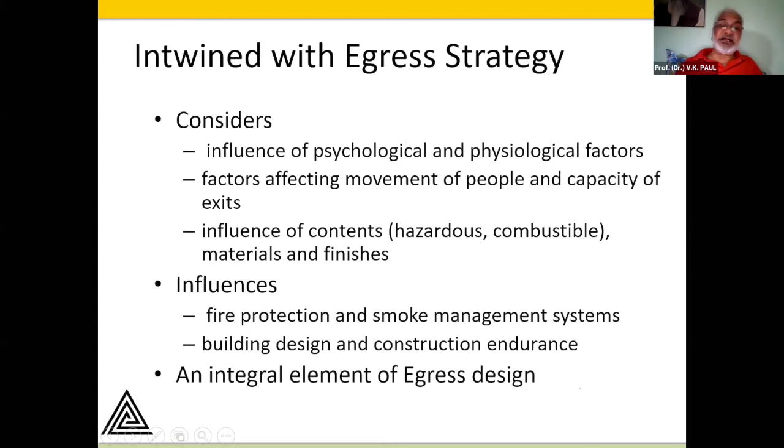Let me give you some idea about how strongly it can impact. Where containment and compartmentation are very well articulated, executed, implemented and followed, they have both strategies very clearly defined, whether they want a staged egress or an all-out egress.

Different countries follow different norms, but essentially the underlying principle they follow is how robust a containment and compartmentation they are able to achieve within the building. So if you are able to do well, then you have both these options, whether you want a staged egress or all-out egress.

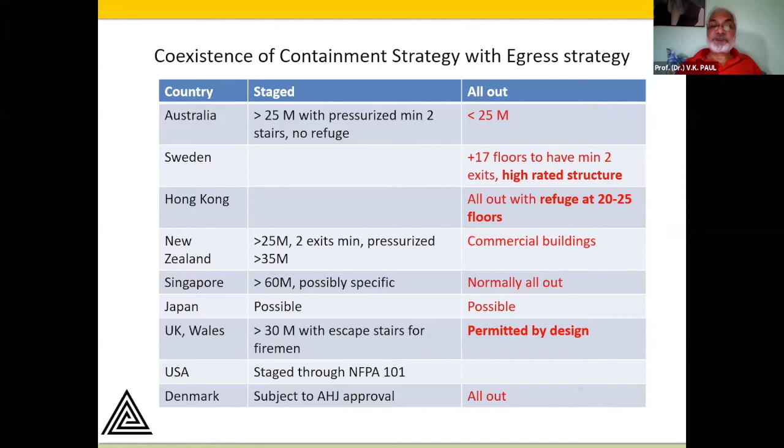So the impact of this kind of strategy is far beyond what we would normally think of. That is just to amplify that in complex buildings this can be a problem.

I would like to start with the issue of fire containment, which is basically the subject under which compartmentation is a subset. Now, basically, what we have is passive fire protection as one of the two approaches of fire safety. One is active and the other passive.

The passive measures require no actuation, and they have a protection which is always present, and it's proactive. It provides sufficient time for the building occupants to exit the building, whereas in case of active systems, they need to be robust.

Active systems have issues related to operational and functional reliability, whether or not they will work, whether or not they will perform the way we want, whether or not there is some kind of another variable that will fail.

Here it is important to highlight that active systems are actually subordinate to the passive measures, and it is only to the residual risk that the active systems will perform. So first the passive systems must do the needful, and then whatever is the residual, that's actually the philosophy behind this.

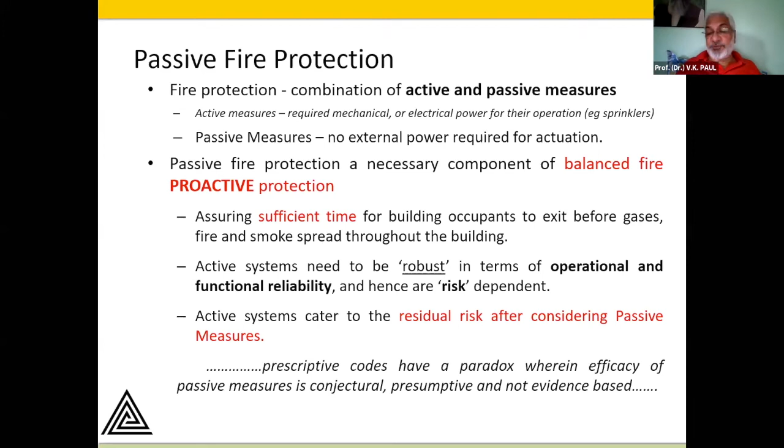Now, in the category of passive fire protection measures, there are three options. One is by control of rate of fire growth, by fire load material characteristics, using safe materials, non-smoke producing or fire resistant material. That's one area where by passive means we can do this.

The other one is to look at the emergency egress, etc., wherein people move out safely. The third part of passive fire protection is what today we are discussing. So it's actually part of a large family of measures that we look at, wherein the objective is to confine the fire, etc.

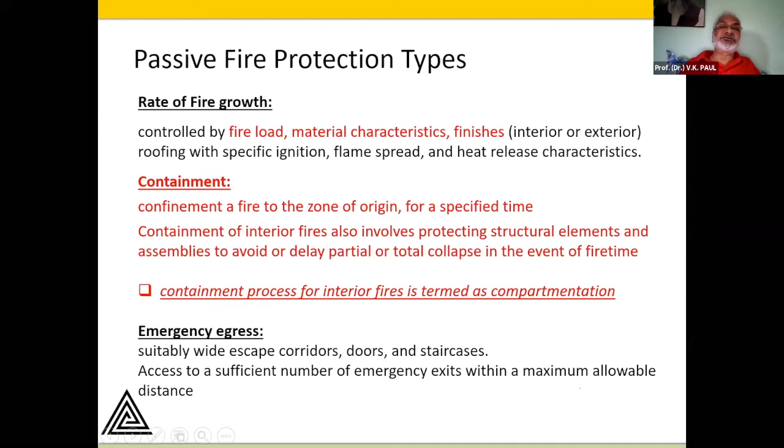And within a containment process of interior fire, compartmentation is one of the areas. Now, I want you to just have a look at the big picture in containment versus compartmentation.

It's not a new concept. Earlier, towns were, way back 300-400 years, divided into neighborhoods so that fires don't spread, and the neighborhoods were divided into building blocks, so that mill type of buildings started coming up way back. Then from there, the concept of fire containment or compartmentation within buildings started coming in the last century, and after that there has been considerable improvement.

Now, this offers protection against passage of flames, hazardous gases, etc., and protection is provided by walls, floor, ceiling assemblies, etc.

If you look at the various containment strategies, principles, or options, the list I am showing here - fire protection structure, doors, shutters, and compartment walls and floors - is just one of them. There are a whole lot of other areas which are also part of the containment family of passive fire measures, which together give us that reliability in the basic design.

Some of you would be aware that there's a new concept NBC also talks about, but in hospitals and ICU areas we very strongly talk about defend in place. That actually is a containment strategy, not a compartmentation measure per se, wherein the objective is continuity of process as a fundamental premise.

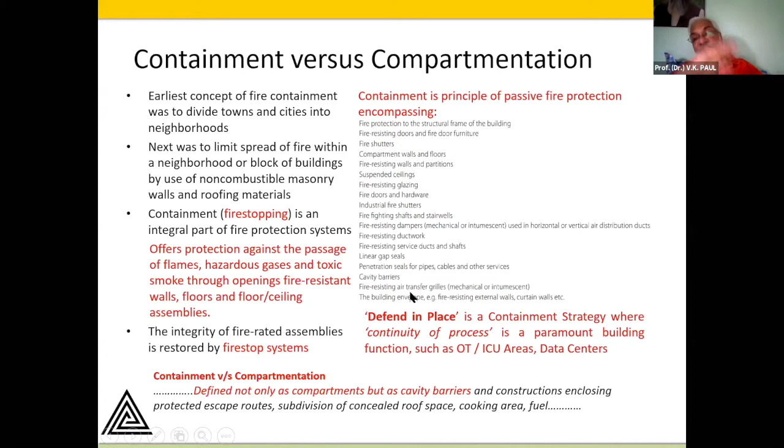It's not a compartment stopping in one zone, but protecting and isolating an area. That also is part of the philosophy - for both of them it is slightly different.

Containment objectives are very simple, and we can easily relate to these. It has to restrict the fire irrespective of where it is, how it is detected, and the containment has to happen fail-safe - it should not go from one area to another, which means it cannot act on itself. So the cavities or openings, if required to be shut, have to be ensured as fail-safe options, and the objective is to provide safety to life and property.

Normally we would not talk about property safety, but in this case it also refers to containing the impact and limiting the fire and consequent hazard to people - internal hazard and exposure hazard - so that adjoining buildings etc. should not be affected. This is one area in fire safety which is so all-encompassing, affecting so many areas of fire safety.

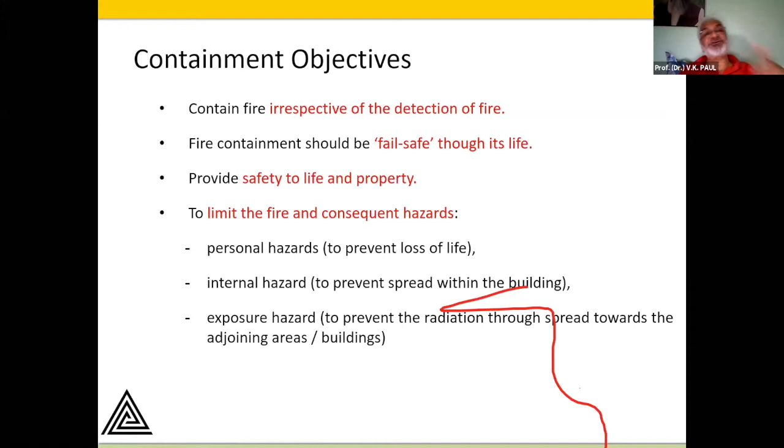I think there is no other philosophy which gives you such a wide variety of objectives to be fulfilled, and that's actually the significance of containment and the reliability that the fire department would have.

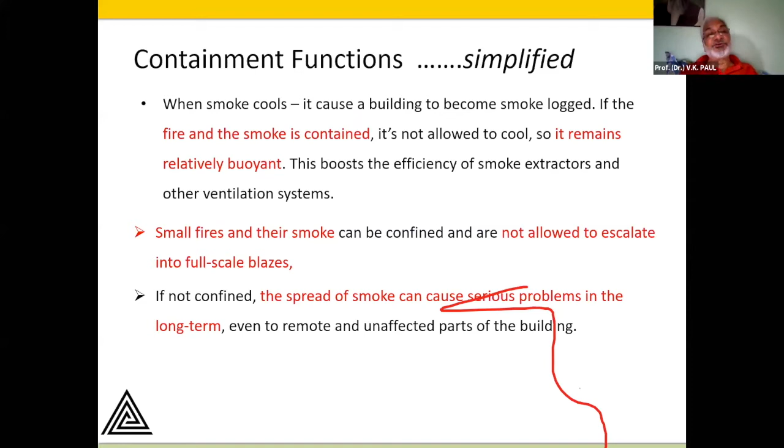In a very simplified way - I don't know why this red color has come - containment functions, in a very simplified sense, control the smoke, as RC Saab was saying in the beginning. It has small fires, and the smoke can be confined and not allowed to escalate into a full-scale blaze, which can cause a serious problem in the long term.

Now, in fire load - this containment, the mother of containment, is actually the fire load issue. How you arrive at containment is not just the square meters of an area and then you provide a wall or something - that's a simpler way of looking at it. What we are looking at is that the fire load decides how big the fire or conflagration would be, and therefore what should be contained.

Here the severity of heat content is to be seen, and therefore we have to look at the fire density and the fire load - how much of the fire load, in terms of calorific value, is to be confined in one place, and what is that potential. Unless that is related to containment and compartmentation, it doesn't make sense.

If you look at the loads in buildings that one would typically consider, it looks at dead load, imposed load, wind load, and any other, including temperature loads. The temperature loads are the fire loads - whether or not the structure will perform.

In the last part, I think it's very interesting to see that there was a study in IIT Gandhinagar in 2018, which says that as compared to 20 years back, the fire load in typical buildings in India has increased three times.

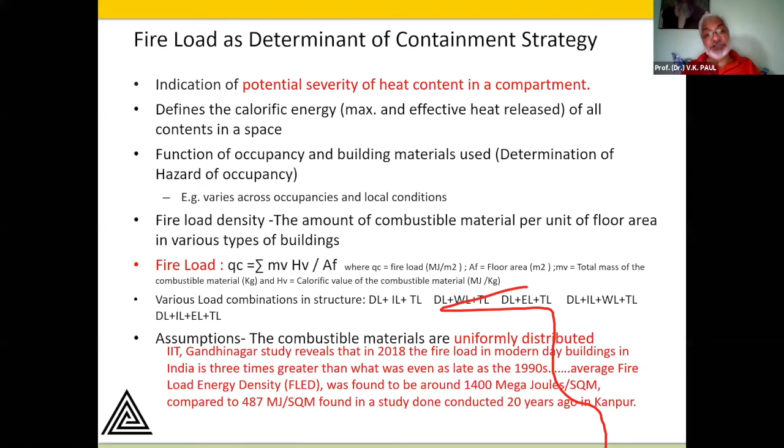So what is the call for us now if fire load is increased 3 times and we are holding on to the issue of compartmentation as one fixed entity that remains the same over the years, without looking at the fire load? I think we are looking at fool's paradise. If the load increases, then the specification and area for compartmentation or containment will also have to change. So this is a very big eye-opener study that calls for really re-examining the entire compartmentation and containment strategies we follow.

This is an important issue. Way back in 1960, we had IS 1641, which addressed different building types and what should be the maximum permissible fire load and how it should be distributed. Over time, society improved, and we forgot about this issue. Even in the National Building Code of 2005, there is a small table shoved in the corner, Table 26, which gave the fire load density, allowing you to see whether the fire load is distributed so that your compartment containment can work.

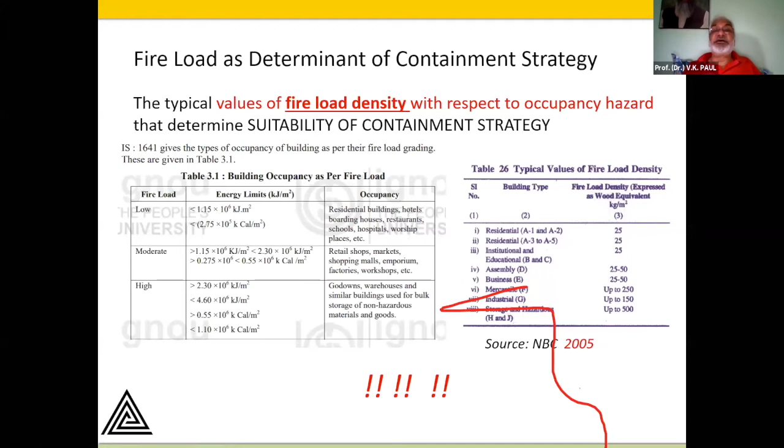Unfortunately, Table 3.1, as I'm showing, got removed from our codes and standards much earlier, and this Table 26 got removed subsequently. But to my mind, removing these two things has a bearing on the principle of containment and fire safety.

Then again, if you look at National Building Code Part 6, where we look at the structure, the imposed floor loads and load characteristics define the endurance of the structure. And if we are looking at fire endurance without having looked at what kind of fire load we are talking about, I think we are not doing justice to the safety of the structure and the occupants, because we are not looking at how much heat is coming. We are actually closing our eyes, putting something in place, but we don't know how big our problem really is.

So that is where there is a gray area, and I think our audience can actually evaluate that and move forward on their own, notwithstanding whether or not it is there in the NBC, but the principle remains the same.

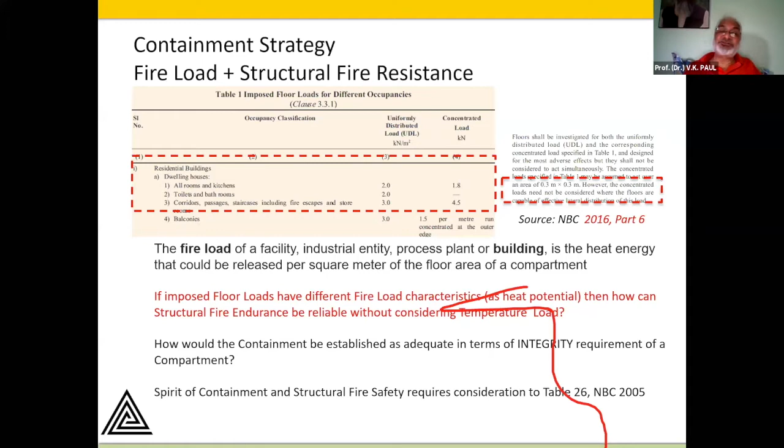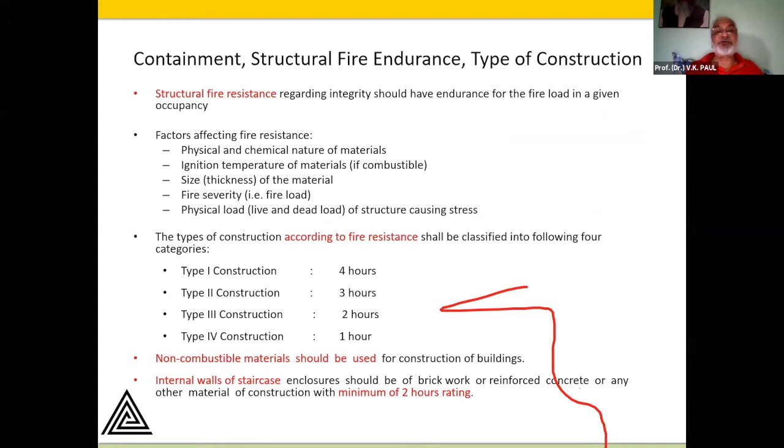Now the same principle gets translated into structural fire and type of construction, and the National Building Code has a very elaborate way of explaining all this. This is not away from the subject we are discussing, and many times people just look at it and overlook what is required to be done. These tables actually have their purpose in our methodology of containment, structural fire endurance, and type of construction - codes, they're all bunched together. So the mother of fire safety actually starts evolving from a description like this.

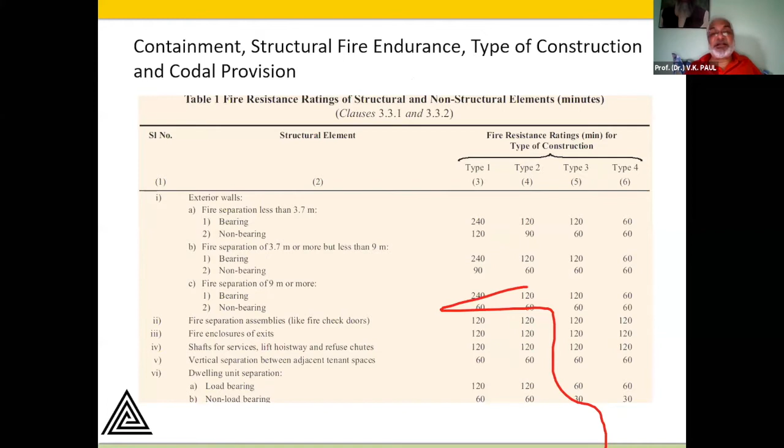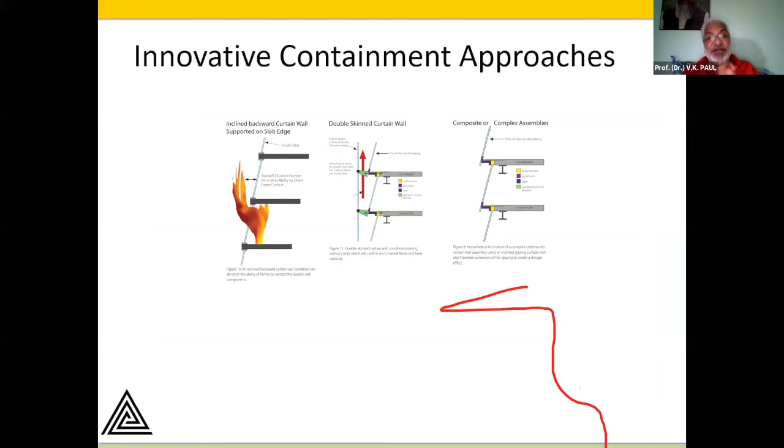Now, as far as our other areas of containment go, for example external perimeter protection, that also is part of containment strategy. I found a very interesting set of envelope designs, where somebody is looking at how flames leaping back into the building can be protected by different options. Now, these are all containment approaches.

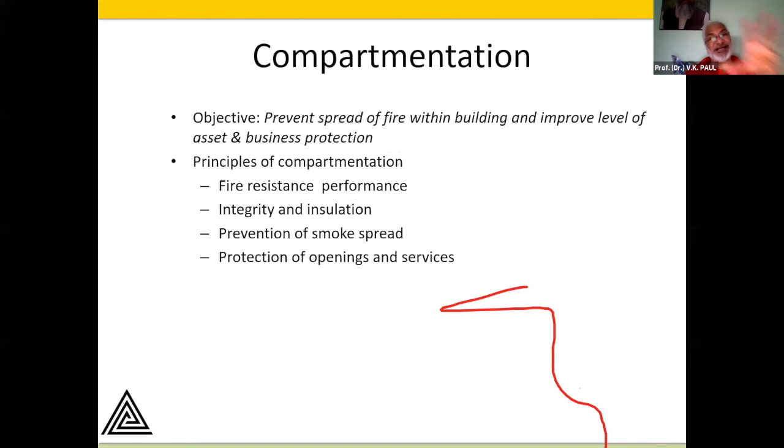Coming to the compartmentation side, the objective is again a subset of that, wherein we are looking at prevention of fire spread within the building. We are looking at fire resistance - performance integrity means it should not lose its position or go out of place under the pressure of expanded gases - and insulation against heat, prevention of smoke, and the openings for services need to be protected. So that's actually the purpose of compartmentation.

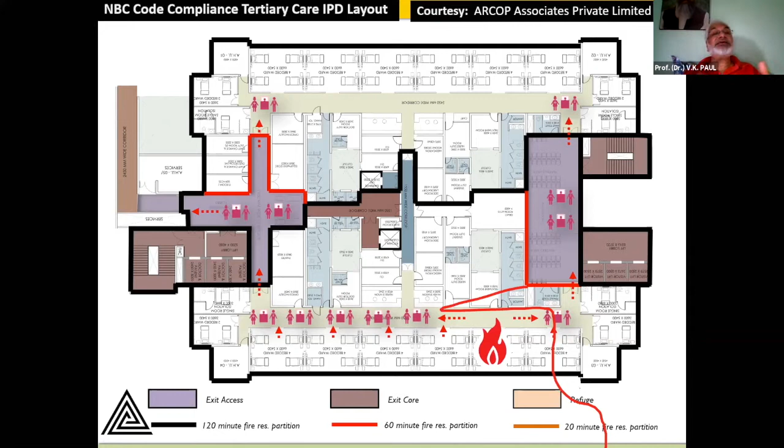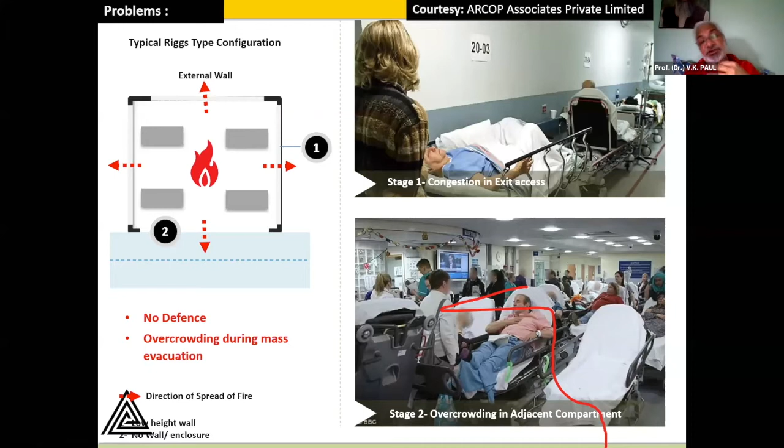Where there are large combustible materials and inflammable materials, pantries are not segregated. I comply with these requirements, but unfortunately I can't protect them. So what we found was that with a large number of entire units shifting to another side, there is no place there. This is a situation we still cannot avoid. These patients, if they have to stay there for a longer time, we cannot have. So we discussed with people like Nitin, and told them this problem will continue to exist. So they came up with a more detailed interpretation of the document.

The complete design was modified, where the same unit is divided in two parts. We have a 20-30 minute partition for each ward area. So if you have to move, you just move people away, you have a protection of 20 minutes. Then from one area you can divide this into a 60 minute area, joining within the 30 minute zone, within the same ward unit. Inside, the different combustible materials and storage are protected differently. So here I don't need that much manpower to actually shift everybody out. This is much more refined, and wonderfully, what has been done is creating an external perimeter of some kind of refuge area where people can be taken out without worrying much about where to go.

Now the best part is that when we change from one design situation to another, the area per patient and the cost per patient of this building remains the same. Which means if you implement all this, the costs don't go up and the area doesn't start increasing. We have an example of this. And if there are any issues or questions on this approach, Nitin is here with us today. We can ask him to clarify these things.

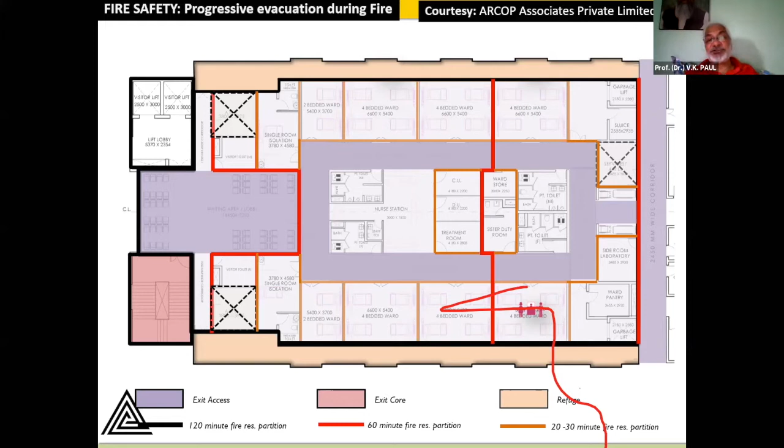Right, Dr. Paul, there are other examples. Sir, just I have to disturb you - I'm enjoying your speech, but the time is up. Yeah, my time is up, sir.

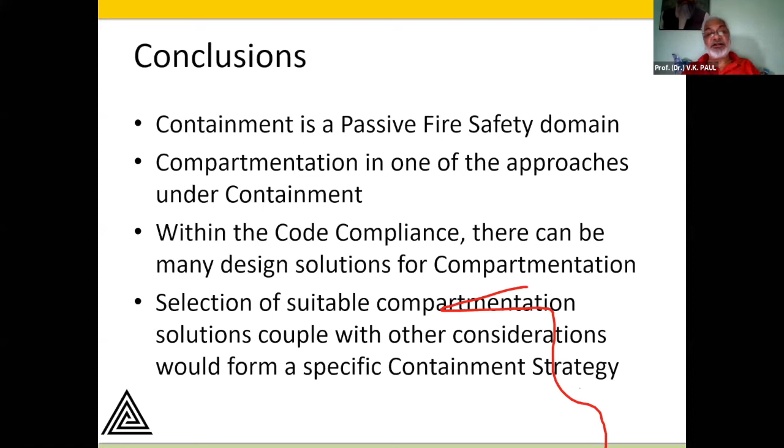The containment is a passive strategy. Compartmentation is a subset of that. Within code compliance, there can be many solutions, and they can all be equally efficient in terms of cost, etc. The selection of a suitable compartmentation solution, along with other considerations, can form the containment strategy. Thank you very much, and if there are any questions we will take them.

And Nitin is also there with respect to that building, he can explain if you want to ask him, we can take him in the question answers later on. No, we can take Purandare, and people have questions, then later we'll ask. Yeah, we'll take the question at the last. I request Mr. Purandare to take over, please.

Mr. Purandare. Yeah, thank you, sir. So, is my screen visible now? Oh yeah, okay. So thank you, Professor Paul, that was really a lot of information in a very short time. Thank you so much, and I think you covered most of it - in fact I'll be able to skip some of my slides because of that.

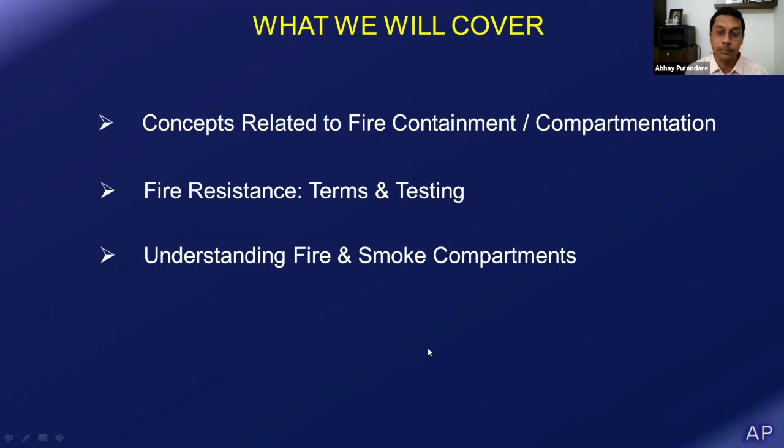So this is basically what I will cover here, and I'll try to restrict myself to concepts. I believe that if the concepts are clear, then the code requirements themselves become much more clear and more acceptable to readers. As Professor Paul has already covered this, I will not spend much time on this slide.

When we talk of passive measures, we are actually doing two things - Professor Paul covered this, but I'd like to cover it in more detail. One is we try to restrict the rate of fire growth, by controlling the ignition, flame spread, and heat release properties of materials, interior finishes, external cladding and roofing. The second is containment - we try to restrict the fire to the compartment of origin or nearby areas, at least for a specified period of time.

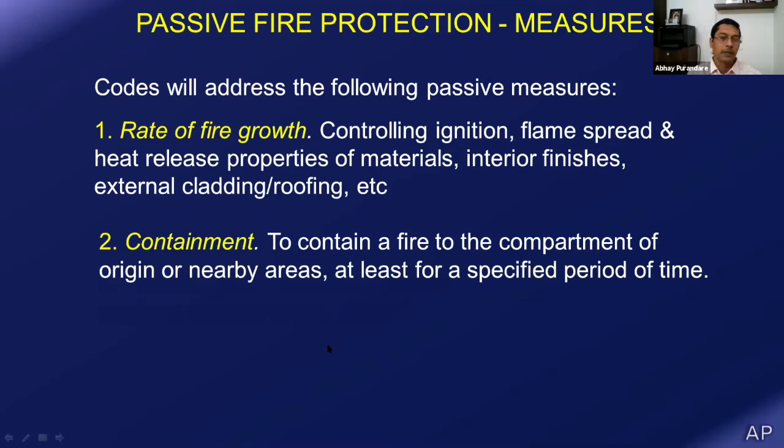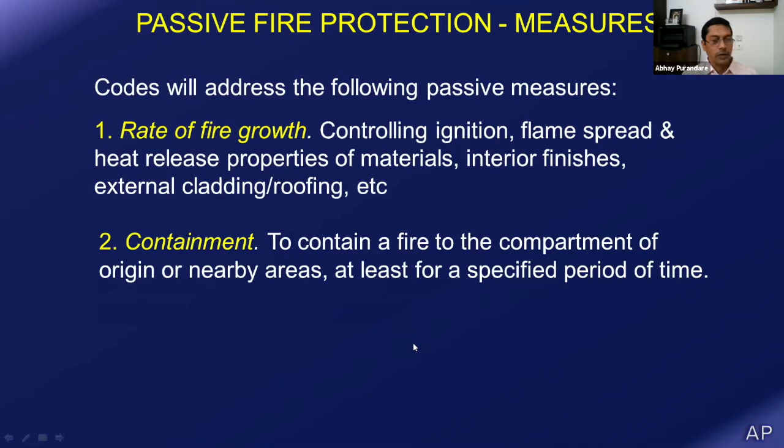As Professor Paul said, containment is a strategy, and it need not be restricted to a building - it can be restricted to a city, or even a large area. Nowadays, when we talk of forest fires, they talk of containment of the forest fire. So containment is where we try to restrict the fire to an area and bring it under control. When we talk of containment of internal fires, it's actually compartmentation, as Professor Paul said - it's a subset of containment.

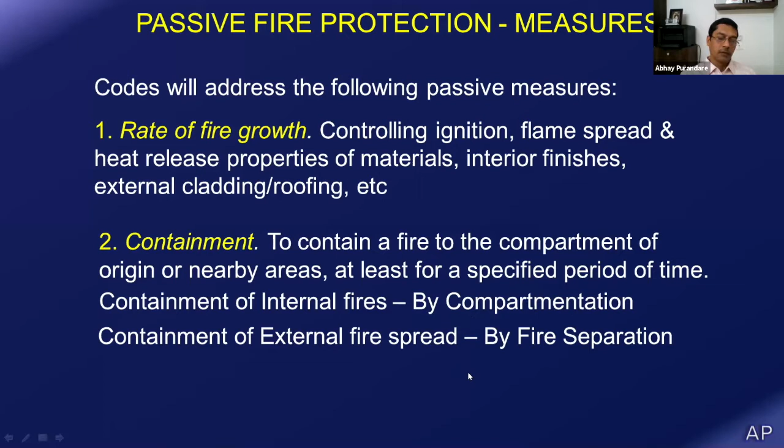When we do containment of external fire spread, we use fire separation. Fire separation is the distance we need to maintain between buildings to ensure radiation is not a factor for fire spreading, which used to be the case earlier. We had a lot of cases of major conflagrations affecting cities, and this used to be the problem.

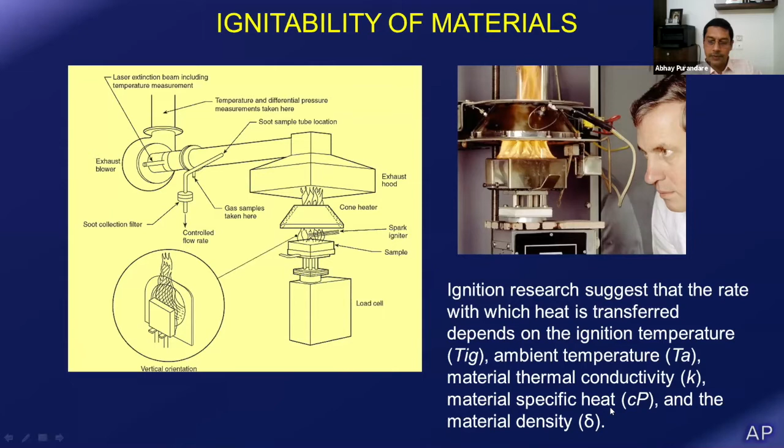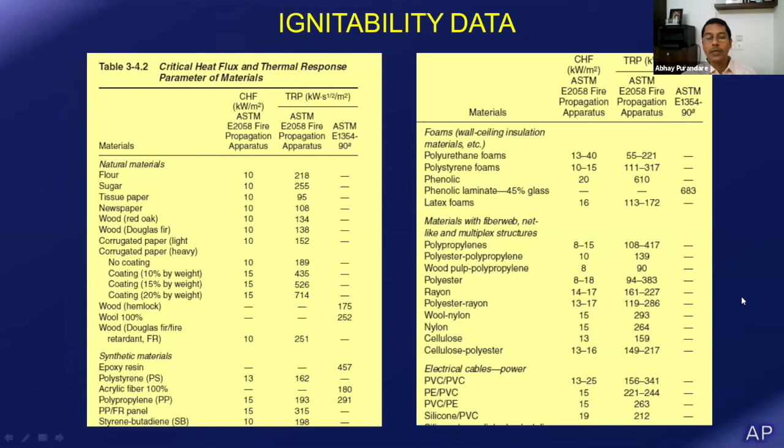Today, when we talk of ignitability of materials, we have a lot of data. We have equipment to characterize the combustion properties of materials - ignition temperature, thermal conductivity, material specific heat, material density. Today we have a large amount of data available, so we can use this to ensure that fires don't grow quickly, to the extent possible where it's possible in design.

When we come to actually controlling the heat energy transfer, once there is a fire, that transfer is what causes the fire to increase. So we use two tactics: we try to control the fuel properties, or we try to control the environment, and we try to control the source-fuel interactions, controlling the heat energy transfer process.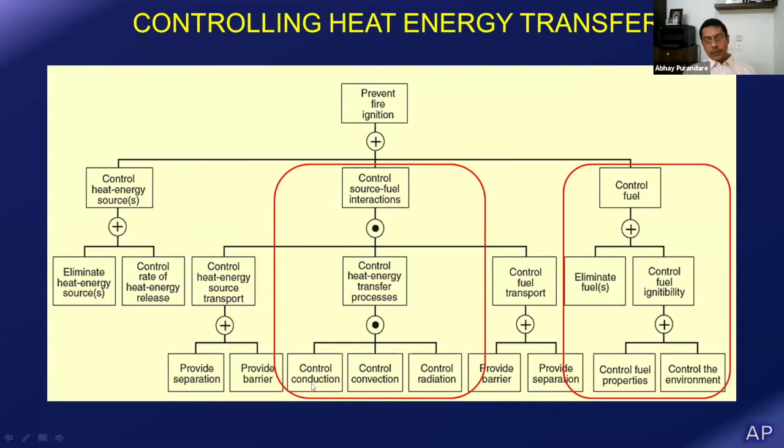In case there is a fire in a compartment, I need to ensure that energy is not transferred to other combustibles which are in close contact with that - that's where compartmentation comes in. So what I'm doing is controlling the conduction, convection, and radiation of the heat from a fire.

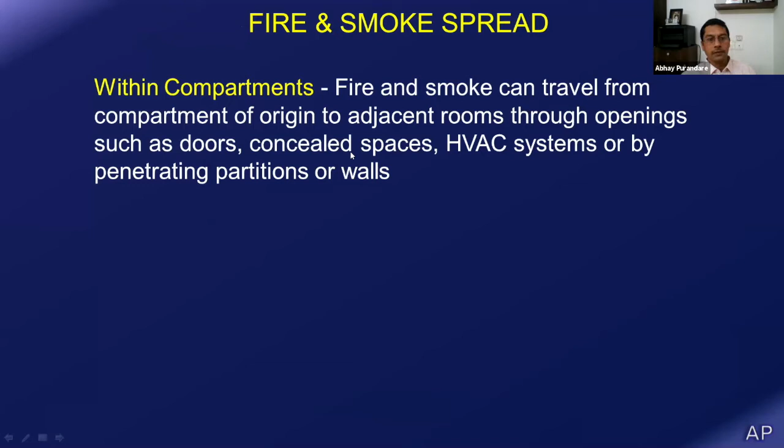Talking of smoke spread within a building fire, we know that within compartments, fire and smoke can travel from the compartment of origin to adjacent rooms through openings such as doors, concealed spaces, HVAC systems, or by penetrating partitions or walls. Between floors, there are always services connecting different floors, and that becomes the passage for fire and smoke.

Service ducts, elevator shafts, stairways - these allow the convected heat and smoke to travel upwards. If the fire-rated separation of these stairs or shafts fail due to any reason, then they become chimneys. They allow the heat to travel up very fast - especially more the height, more is the stack effect - and this allows the heat and smoke to travel fast.

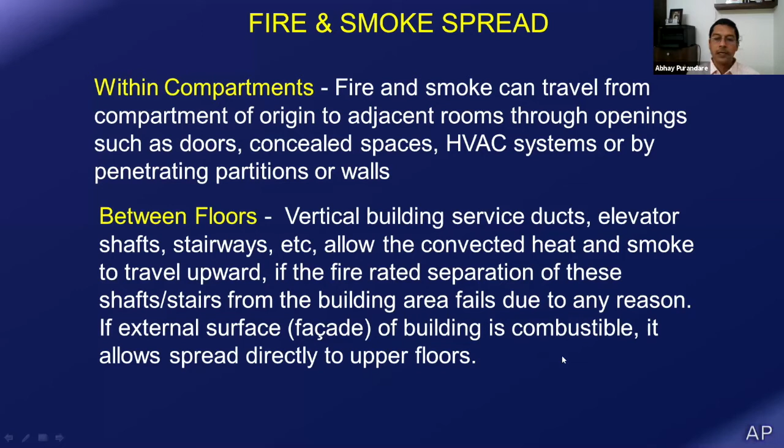Of late, what we are finding out is that the external surface is becoming a big problem. It's allowing fire to spread directly to upper floors. So you may have good internal passive fire protection, but if your external surface is combustible, then it allows the fire to spread upwards as well.

But the reason why it failed was that the fire grew so fast, the amount of combustibles were so high, that the actual fire size was much more than what would have been expected in this kind of building.

The fire occurred on the 22nd floor in a linseed oil-soaked rags, so some furniture work was going on. As you know, linseed oil self-combusts, so the phenomena of self-ignition takes place in case of linseed oil, and that happened.

By the time the fire department arrived, the fire was well developed and had dropped down to the 21st floor also. Heavy smoke had already entered stairways and floors immediately above the 22nd. Fire continued for 19 hours and involved 8 floors at its peak. Fire attack was hampered by complete failure of the building's electrical system and inadequate water pressure. So there was a problem related to firefighting, but the fact is that the fire size on those floors was so high that though fire compartmentation was provided, fire-rated exit doors were provided, they could not sustain that attack from the fire.

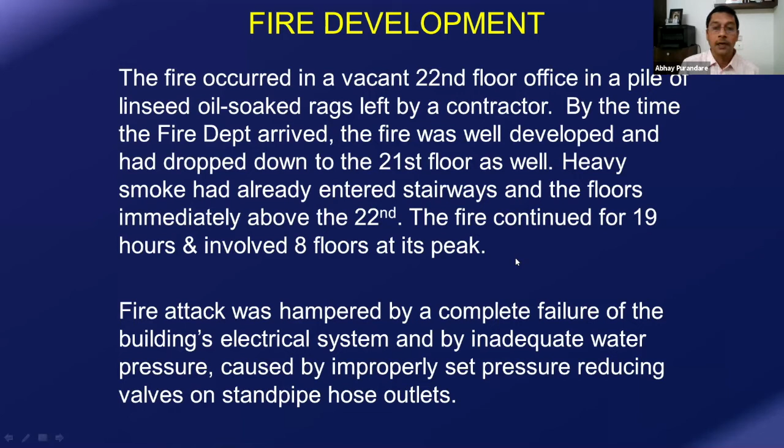Fire-resistant rated construction features, particularly floor-ceiling assembly and shaft enclosures, failed. Ventilation openings in stairway enclosures permitted smoke to migrate into the stairways. Unprotected penetrations in fire resistance rated assemblies and absence of fire dampers permitted fire and smoke to spread vertically and horizontally. As Professor Paul rightly said, it's not just about providing a fire rated wall - there are so many aspects, in fact much more than the walls, that are important, and it's the weakest link here which matters.

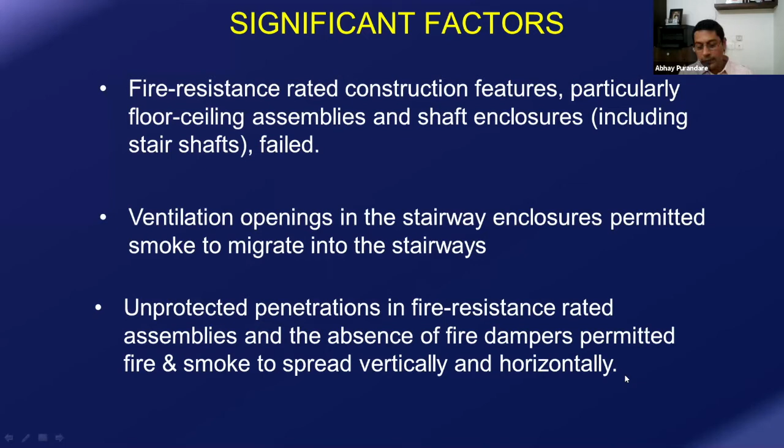So that's from where the fire will spread. This is another incident I'd like to share. This is different because the fire spread not from the inside, but from the outside. This is the First Interstate Bank. What happened was the fire started around the 12th floor, and then it flashed over.

The floor plate was about 2,200 square meters, which was a big floor plate. There was no compartmentation, and because the fire size was big, it flashed over, flames came outside, and then it spread upwards. About 6 floors were affected in this fire.

So fire originated in an open plan office, meaning there was no separation of the space, no compartmentation within the floor. Fire extended to the entire open area. Several office enclosures fully involved the 12th floor except for the passenger elevator lobby.

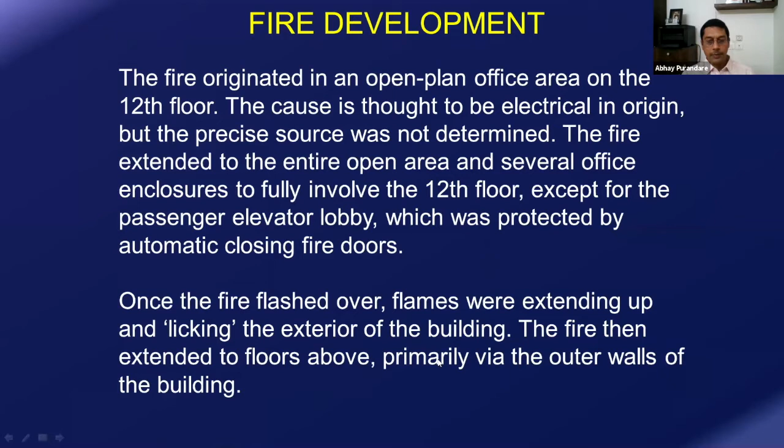Once the fire flashed over, flames were extending up and licking the exterior of the building. So the fire then extended to floors above, primarily via the outer walls of the building. External exposure from flames allowed the fire to externally spread upward from the 12th to 16th floors.

Windows broke and flames penetrated around the ends of the floor slabs. Curtain walls, including windows and spandrel panels, were almost completely destroyed. There were no eyebrows to stop the exterior vertical spread.

Fire extended at a rate estimated at 45 minutes per floor and burned intensely for approximately 90 minutes on each level. This resulted in 2 floors being heavily involved at any point during the fire.

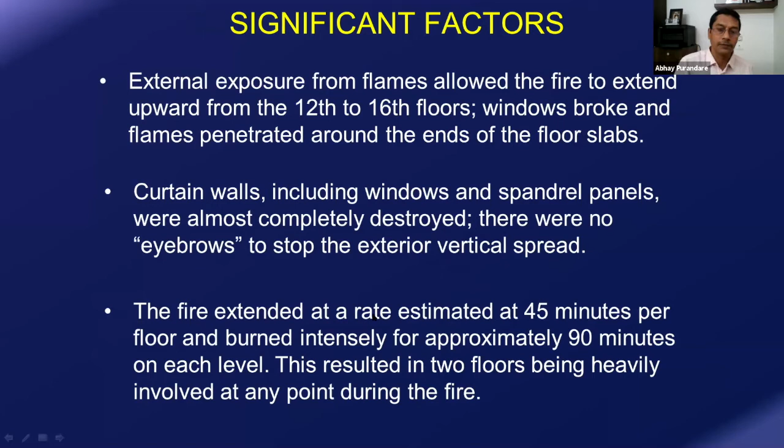Now, these are fires which happened with supposedly very efficient fire services in developed countries, but even they could not do anything, because once the fire grows beyond a certain size, once it involves multiple floors, there is really nothing firefighters can do. It's very difficult to achieve control over such fires.

So what we are trying to do is segregate a large fire compartment into smaller and more manageable compartments using fire compartmentation. This is to keep the fire limited to a smaller area so that its effects are limited, and it can be controlled quickly by firefighters.

Fire limited to a compartment will have a lower heat release rate as compared to fire involving multiple compartments, and hence this will generate less smoke. This improves the survivability of occupants and reduces damage to property and structure.

The amount of fire effluents, carbon dioxide, carbon monoxide, which are being generated, are dependent on the mass loss rate—that is, how much mass is being combusted. And the mass loss rate is again dependent on the heat release rate of the fire.

What is the size of the fire? The more the size of the fire, the more material is burning, and the more gas is being generated. So obviously, if I can restrict my fire size, I am generating less effluents, and less effluents are likely to travel to other compartments or other parts of the building.

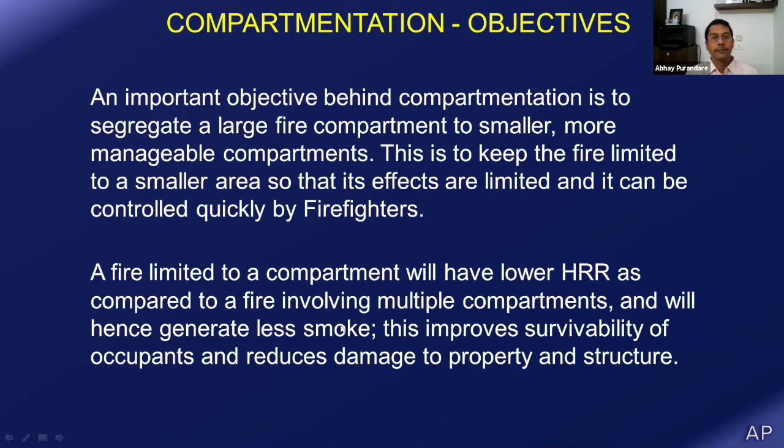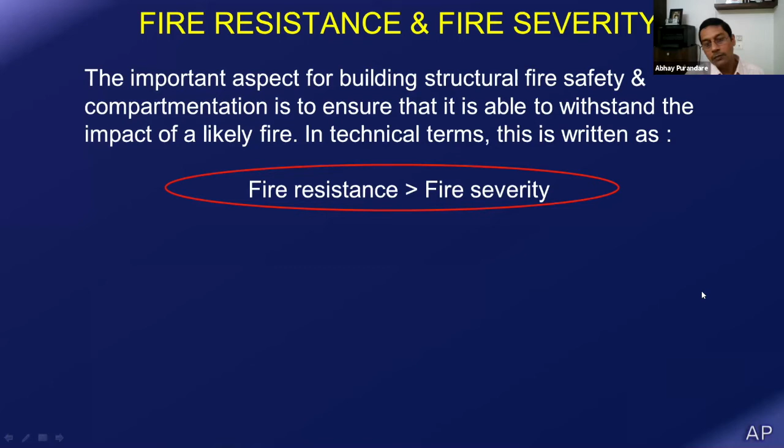When we are talking of creating a compartment, we need that compartment to have some fire resistance. The important concept is that fire resistance should be greater than fire severity. In the two case studies I showed you, the fire severity was actually higher than the fire resistance provided, and that was the reason why the compartmentation failed.

Fire resistance, as most of you are aware, is a measure of the ability of the structure to resist failure, whereas fire severity is a measure of the destructive impact of the fire, or of the forces or temperatures which could cause collapse or other failure.

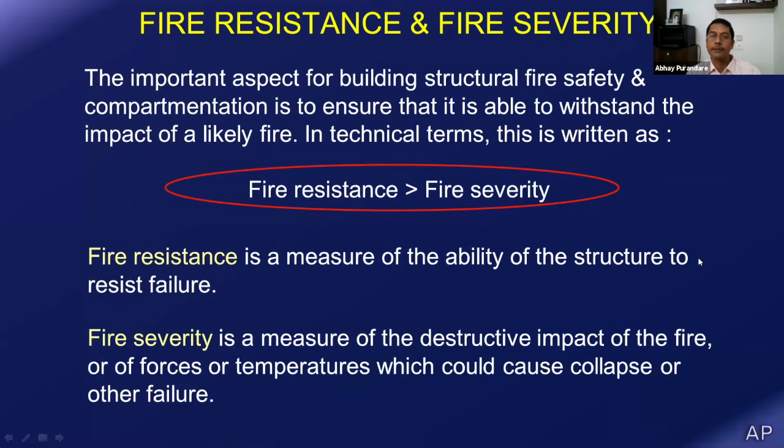I won't go into this, I'll try to move to the next slide. So this is how NBC defines fire resistance—in terms of the load bearing capacity, integrity, and insulation. These are the aspects, depending on the kind of structural or non-structural element being tested, which will be tested.

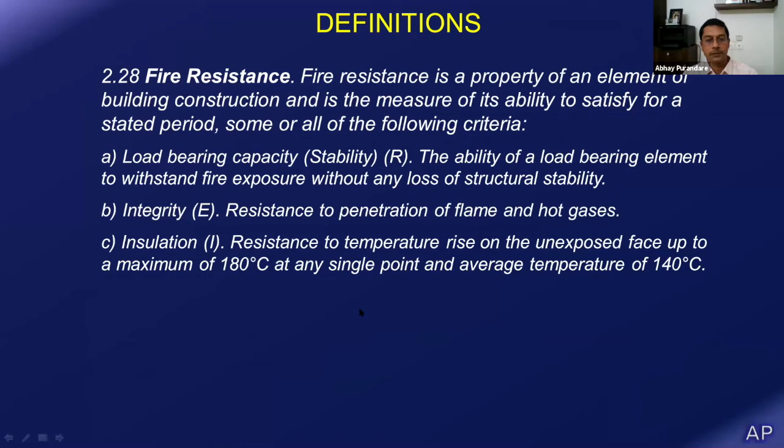So, how do we measure fire resistance? We measure it using different test protocols, and this is measured in terms of time. So how do I measure it?

I measure it using a furnace. I expose that element to a specified temperature for a given period of time, and if it passes the test, then it is given a rating.

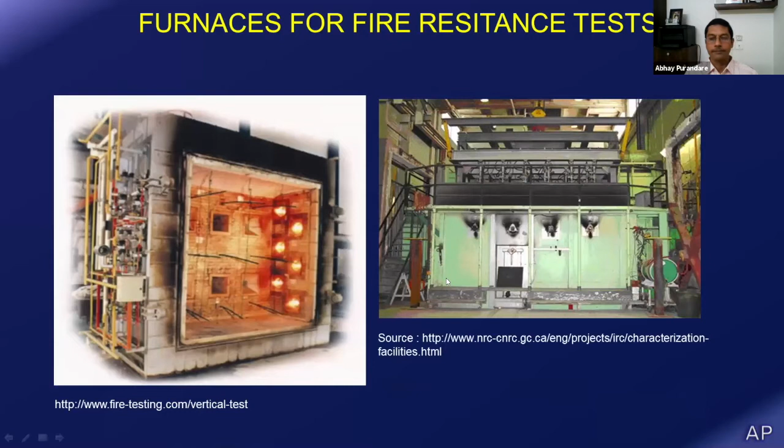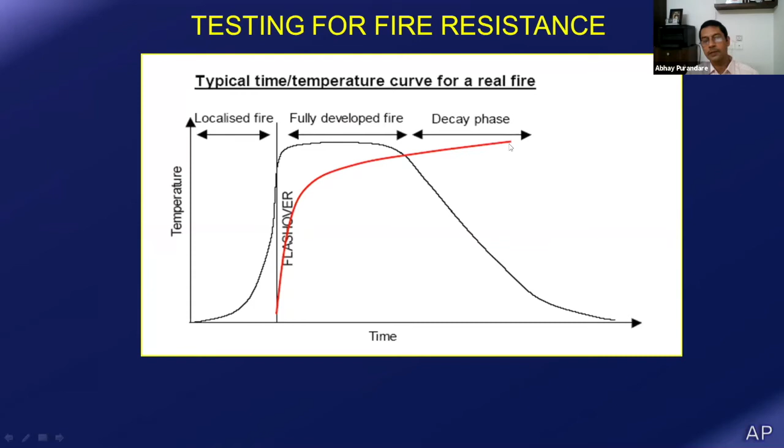And what is the temperature to which I expose that element? So you will see here, this is a standard natural fire curve, what happens in a compartment, whereas what you see in red is actually the test fire curve. Natural fires decay after a certain time, whereas the test fire curve actually goes on, so it's considered a more severe representation of a fire.

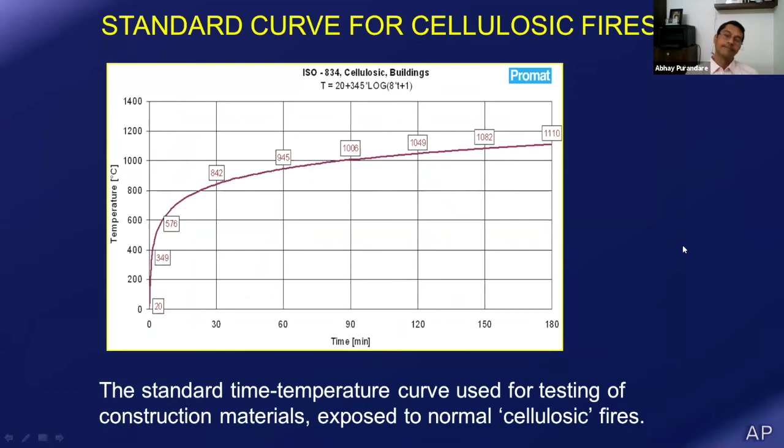And how do we do this? We use a standard fire curve. Currently we are using ISO 834. Even within, we had an ISI standard, but now we use the ISO 834 curve. So this is how the temperature rises in that furnace.

And we have other curves as well. Different countries may follow different curves, or if you're in an industry where there are flammable liquids, then you may use the hydrocarbon curve.

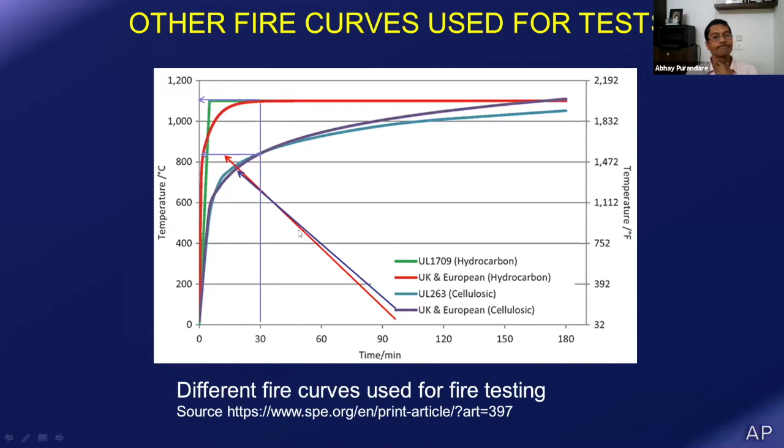And how do we measure the fire severity? There are some formulae proposed by fire scientists, where we consider the fuel load, the ventilation factor, and the lining materials used. Based on that, you can calculate the fire severity in terms of time. So for a given compartment, I may get a value of 130, and if I provided a fire resistance of 120, then it might fail.

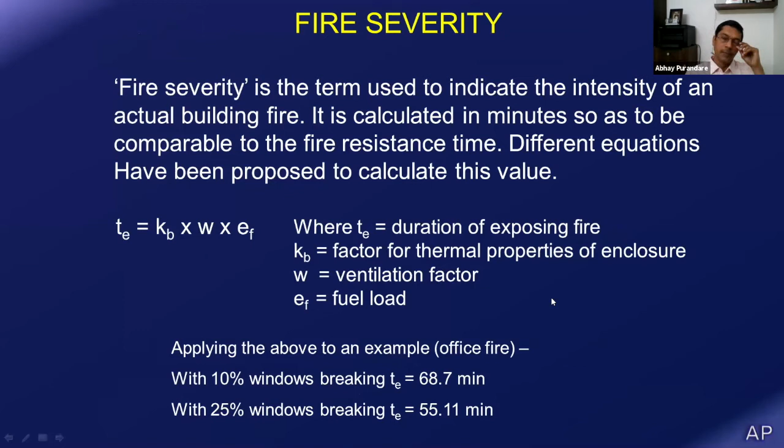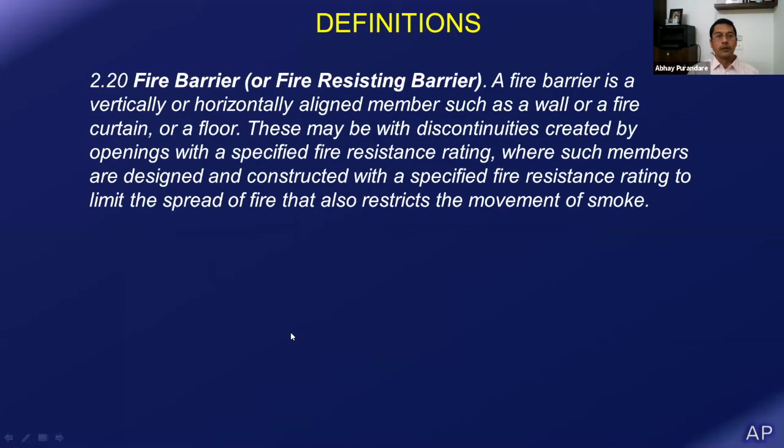I would quickly also like to share two concepts related to fire barrier and smoke barrier. These are two different concepts, and I will use the IBC here. IBC is the International Building Code, which states that a fire barrier is a fire resistance rated wall assembly of materials designed to restrict the spread of fire, in which continuity is maintained.

It can have different fire ratings, as you see here, and obviously there are going to be openings in that, so there will be doors, there will be AC ducts going through that, and for that there is some requirement given. This is a definition given in NFPA 101, similar to the IBC.

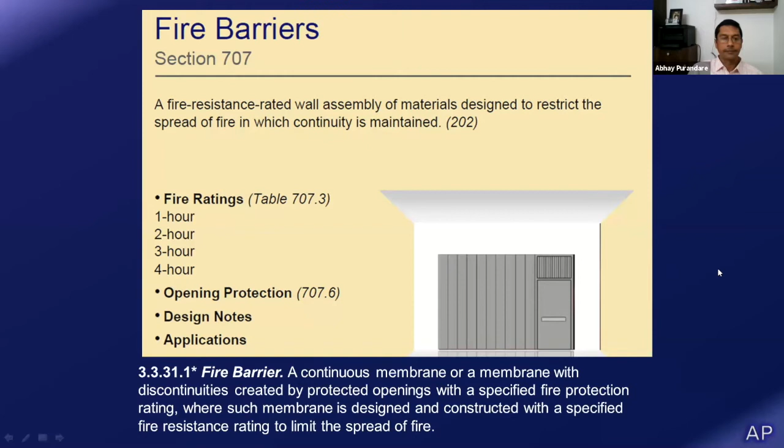Whereas a smoke barrier is a continuous membrane, either vertical or horizontal, such as a wall, floor, or ceiling assembly, that is designed and constructed to restrict the movement of smoke. So the difference between the smoke barrier and the fire barrier is that in the second case, it is specifically to restrict the movement of smoke. It is related more to fire safety and smoke control systems.

Though it does have a fire rating, even smoke barriers have a fire rating, typically 1 hour is what will be required. Also there will be openings, so there will be doors, there will be HVAC ducts which go through a smoke barrier, and those will have to be smoke protected. So that fire door also will have to pass a test for passage of smoke.

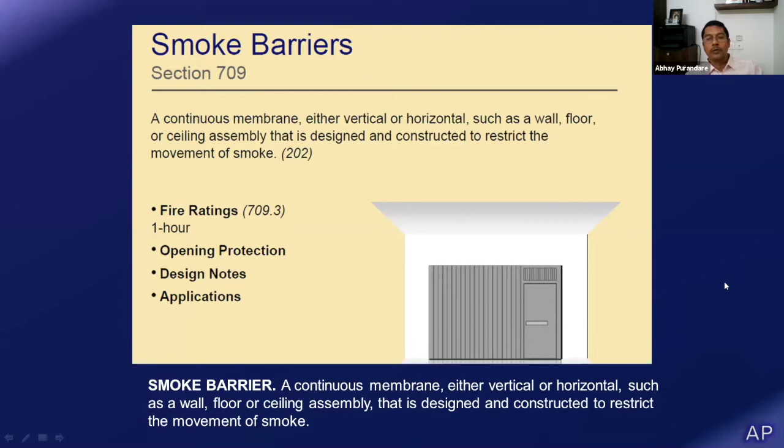And this is a simple example. You will see here these are the opening protectives related to doors and other openings. For fire barriers, you will see that if I have a 4-hour fire barrier, I will need a 3-hour door or fire assembly rating.

Note that this is different in NBC, I'm just showing it for reference, this should not be construed to be what is required in NBC. And if you look at smoke barriers here, you will see that for a smoke compartment which I'm creating, a 1 hour, or 1/3, 20-minute door is accepted there. That's not accepted in NBC currently.